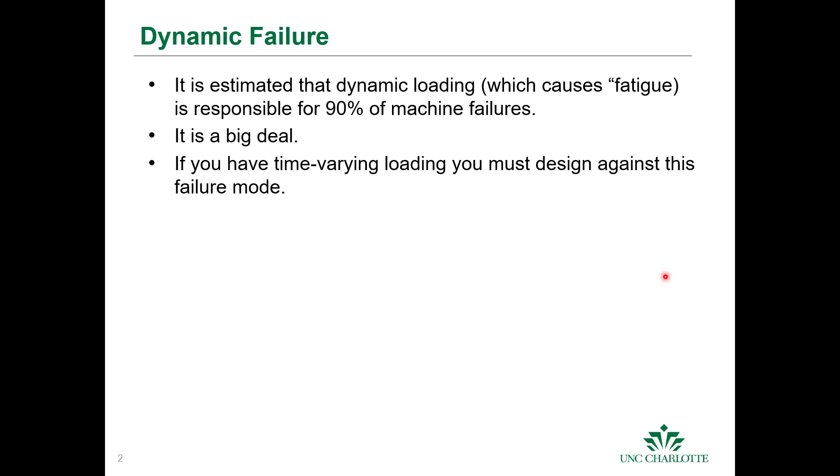The term fatigue failure is somewhat of a misnomer. It's accredited to Poncelet in 1839, where he said that the material became tired and became embrittled. We now know that materials don't get tired, they actually fracture due to cracks that initiate and propagate until they have catastrophic failure.

In 1982 U.S. dollars, they did a study. They found out that the cost to the U.S. economy for fatigue inspection and loss was about $100 billion, and that's about 3% of the gross national product. So as you can see, as a mechanical engineer, this is a primary concern in designing machines.

So what we talk about today will kind of help get you to a place where you can design machine components. But if there's larger structures such as aircraft, the theory that we cover here wouldn't cover the design of those machines, and they would require in situ testing of the product in the field.

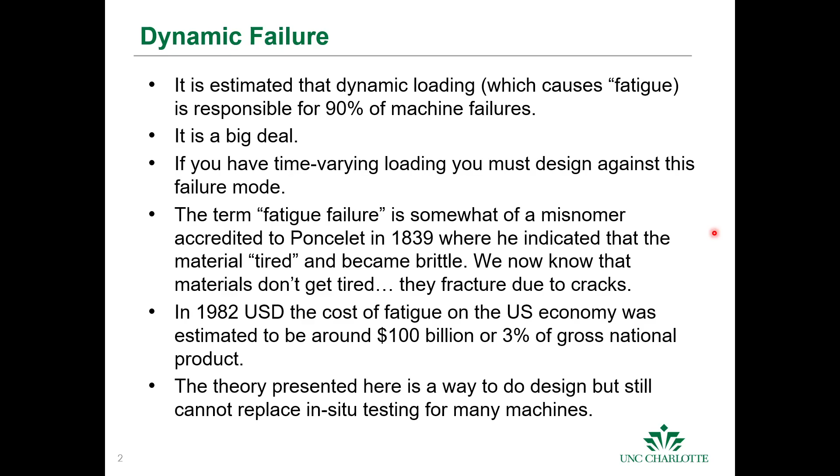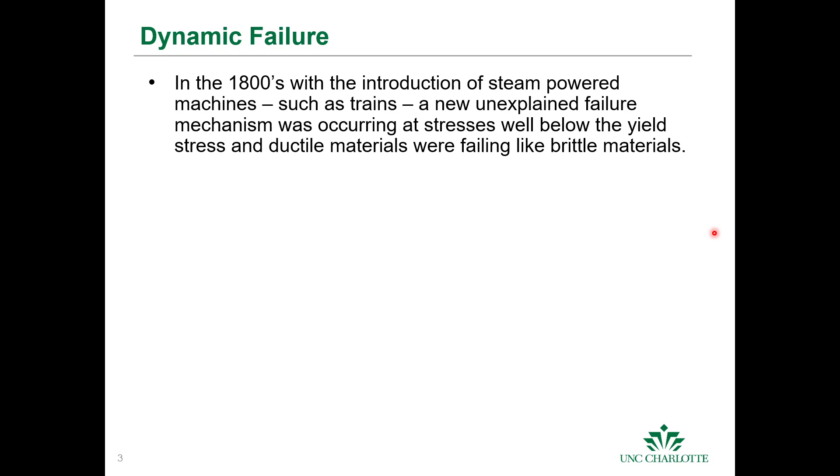Fatigue really wasn't discovered as a phenomenon until the 1800s, and that's when steam-powered machines became more widely used, and the axles in the trains would break even though they were made out of ductile material, and their failure surfaces looked as though it was just a brittle material. Which was confusing because there was no real theory to predict what was happening or why it was happening. But we now know that it was because of time-varying bending stresses that caused them to catastrophically fail.

It was August Wohler, a German engineer who spent over a decade studying this phenomena. And in his lab, he created a test experiment where he had fully reversed loading and discovered that there was a relationship between the failure and the number of cycles at different loads.

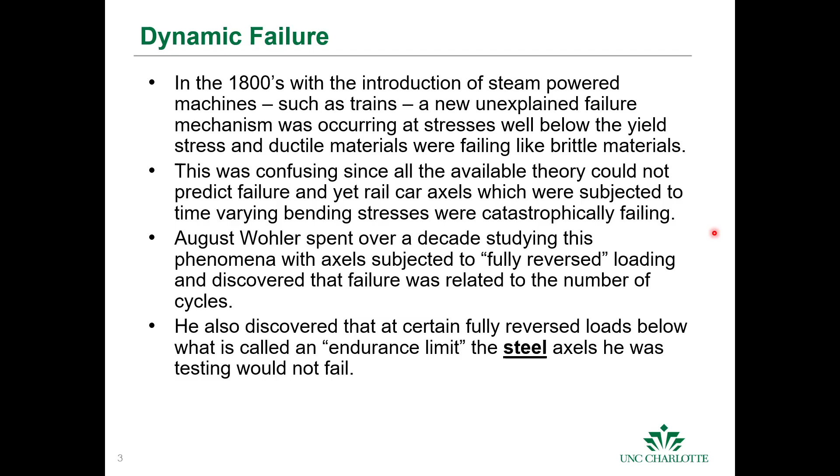He also discovered that below a certain load, even if it was a time-varying load, that the material would not fail in his tests, and this is what we now call the endurance limit. And the endurance limit is not in all materials. It's in most steels. And his work is summarized in what we call an SN diagram, where S is the strength and N is the number of cycles, or a Wohler diagram.

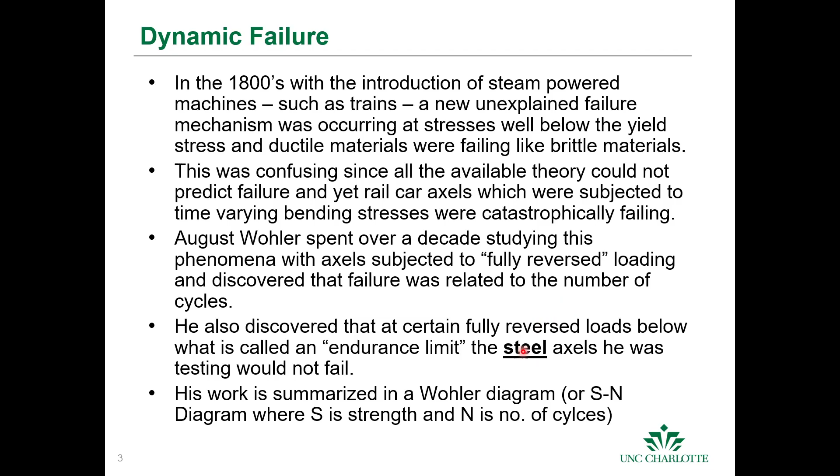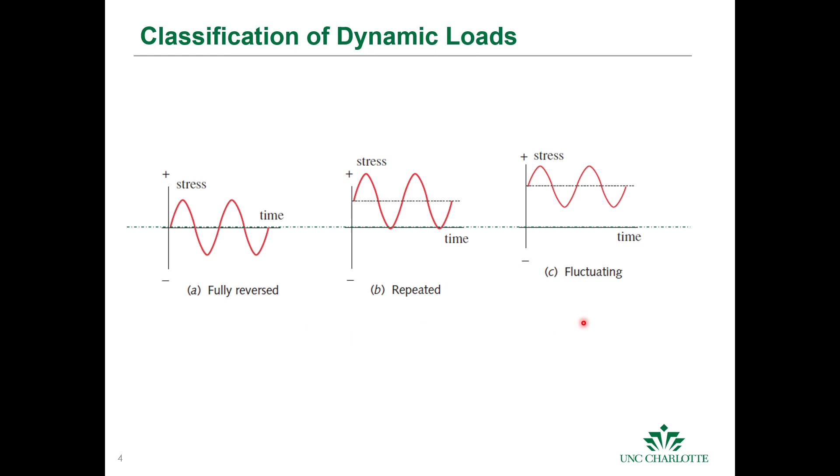That means that if it's subjected to a cyclical load at some point in time, it will fail. There is an endurance limit, however, for many low-strength carbon steels, alloy steels, some stainless steels, irons, molybdenum alloys, titanium alloys, and some polymers.

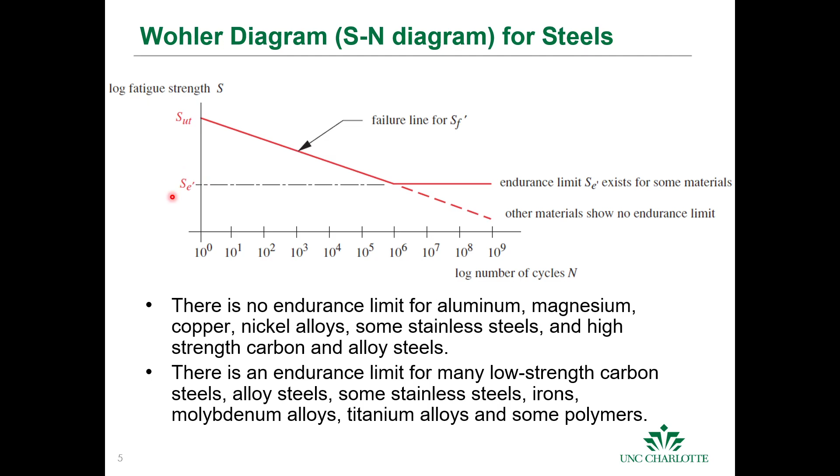So when we're doing a design, when we pick the material, if we're picking a material that's subjected to a dynamic load, we have to make sure that we'll never reach a certain number of cycles, or that we design so that it's a material that has an endurance limit and we stay below this endurance limit stress. And this is fully reversed stress that we're talking about. We have to stay below that value to guarantee the life of the product.

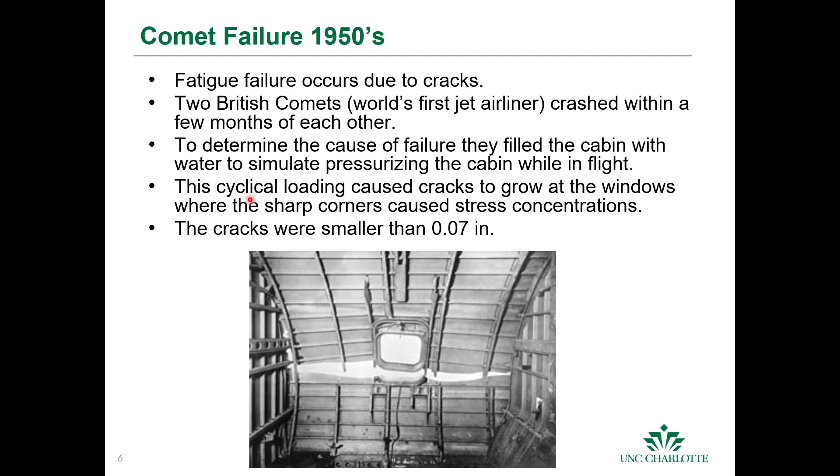Fatigue occurs because of cracks. There were two British Comets, the first jetliner, and they crashed within a few months of each other. They took the debris and reconstructed a test to determine what was causing the failure. They filled the fuselage with water and pressurized the cabin to simulate the stresses that would occur in flight. They found that cyclical loading caused cracks to grow around the windows, and these cracks were less than 70 thousandths of an inch. So even very small cracks in the structure, when subjected to dynamic loads, can cause catastrophic failure.

We now have pretty good understanding of how fatigue failures develop, and this is a description. We have three phases of fatigue, and the first phase is crack initiation.

This is usually a relatively short period of time, because of material imperfections, either real cracks on the surface or material imperfections inside the material, like inclusions or dislocations or foreign material inside the actual material. These cause microscopic stress concentrations, and those stress concentrations cause the material to yield due to the high stresses at those locations.

They exceed the yield stresses. You get localized plastic deformation, and these create what are called slip bands along the crystal boundaries of the material. If we zoomed in here, this shows the grain boundaries of, say, some metal material, and it has some imperfections. As it's loaded, these imperfections will move to the boundaries, and those boundaries merge into microscopic cracks.

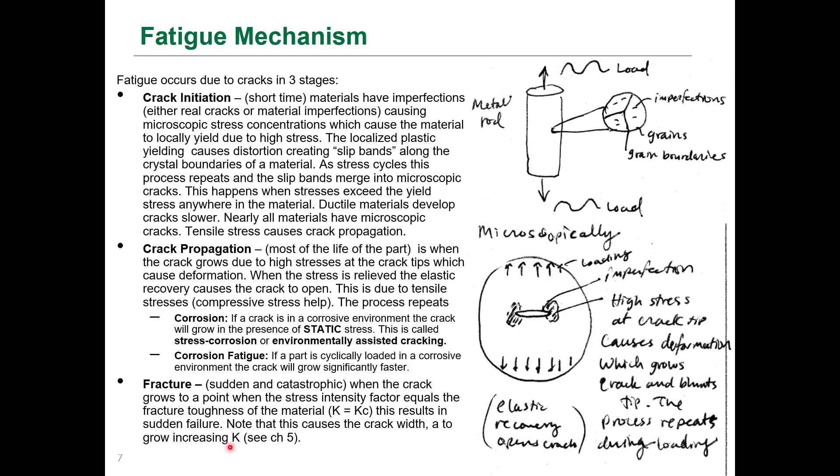Based upon what we know from Chapter 5, that causes the crack width, A, to grow, and when that crack width grows, it increases our stress intensity factor. Now remember, this is not your stress concentration, this is your stress intensity factor, and we can compare that with the fracture toughness, which is a material property.

If we zoom in on a material that has been fatigued, we can see these little beach mark patterns where you have a crack, and that crack is subjected to cyclical stress. It propagates along the surface with those cycles of stress, slowly and slowly and slowly, until you get failure. So you can see here, this is the origin of a crack, and it just moved all through the surface.

This is a keyed shaft that's in rotating bending. You can see how these lines move across the surface until you finally have a small area where your stress intensity is equal to your fracture toughness, and the material ruptures.

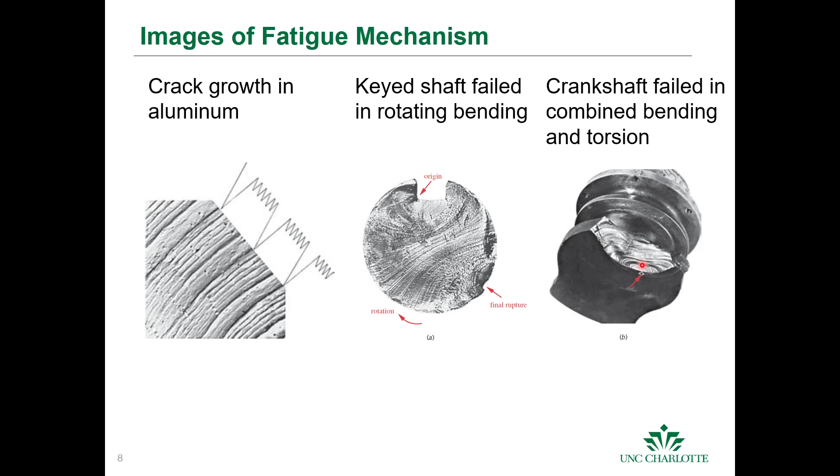This is another view, a crankshaft subjected to bending and torsion. Again, you see those marks and how the cracks propagate through the surface until finally it fractures off.

It turns out that the patterns left behind from a fracture are related to the type of bending, and this is a graphic from your book which shows how the crack propagates through a surface with different loading conditions. This here is a tension or tension-compression mechanism.

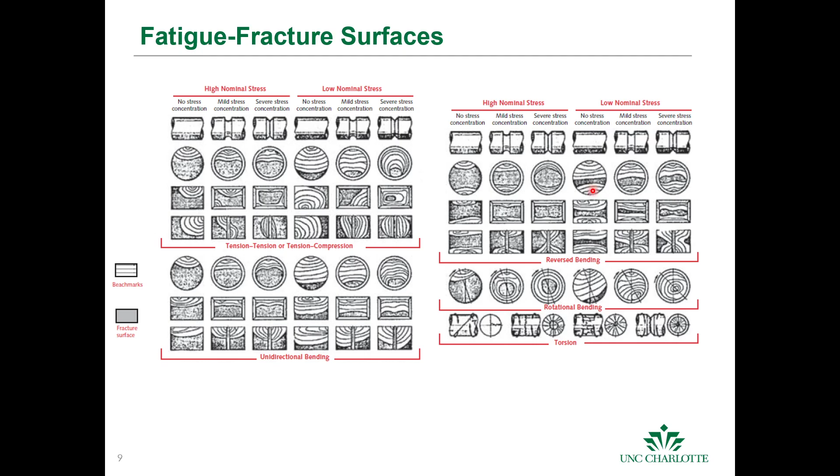And down here, this is from one directional bending, so this would be bending down in this direction. You can see the crack propagates until you get to a certain point in this gray area in all these graphs. This is when the surface fractures. You can see it for different geometries and different loading conditions. And here, if you have reversed bending, the cracks will propagate from both sides.

When we talk about fatigue failure models, we have a few different ways to look at fatigue, and we separate fatigue itself into low cycle fatigue, which is less than 10 to the 3 cycles. Some authors use 10 to the 2 to 10 to the 4. High cycle fatigue is greater than 10 to the 3 for the purpose of this book. We'll call low cycle fatigue those less than 10 to the 3, and high cycle fatigue greater than 10 to the 3.

We can use stress life models, strain life models, or linear elastic fracture mechanics. Stress life is the one we're going to use in this class, and it's used for high cycle fatigue. In general, the machines we're considering for this class are when we want a part to last more than 10 to the 3 cycles. This allows us to determine the fatigue strength of a material, expressed in units of stress, and we can relate that to the stress we expect the part to experience during its lifetime.

It's the least accurate of the methods, and we have to use safety factors and correction factors in our design based upon the environment, geometry, and some other factors that we'll talk about.

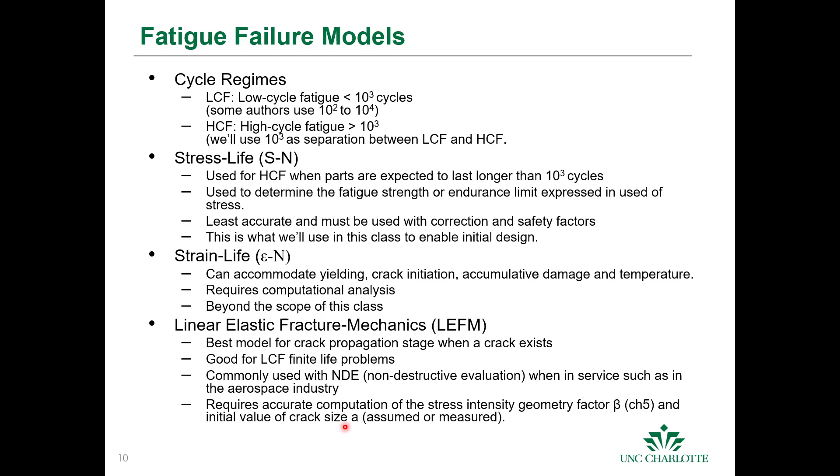It requires that they accurately compute the stress intensity geometry factors, which is the parameter beta from chapter 5, and that they have initial crack sizes that are either assumed or measured.

As I mentioned briefly, for a lot of machines that have predictable loads, such as rotational machinery, the stress life approach is suitable. For example, a crankshaft that's going to run 100,000 miles, we can calculate that it's going to experience about 2.5 times 10 to the 8 cycles and design against that.

For machines that potentially experience low cycle fatigue, such as transportation machinery where the loads are uncertain, like a hard landing or turbulence in an aircraft, or a ship that goes through a storm, these require intensive inspection and instrumentation data collection. This here is an image of a general loading condition, and you can see how the stress and loading can vary widely over time.

This is for a ship. This is moderate weather, this is a storm with high winds, and you can see how it's very difficult to predict the fatigue and remaining life for this. This is an aircraft in flight that experiences some turbulence, a thunderstorm, and then normal flight. In these cases, extensive testing and measurement is done.

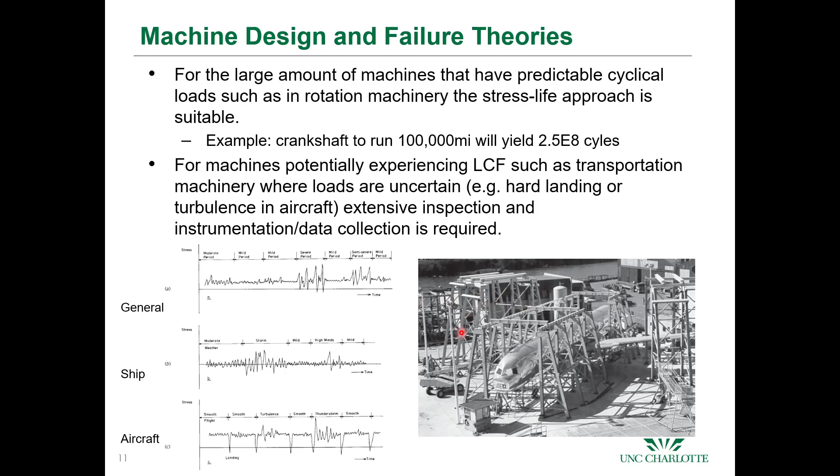When we talk about fatigue and the fatigue load classification, what is of interest for us in designing machines is to calculate our minimum and maximum stresses from our cyclical loading. The delta sigma is the difference between the max and minimum stresses. The alternating component here is the amplitude of the stress, it's the max minus the min over 2.

And then we have the mean stress, which is just the average stress. And then we have a stress ratio that's defined as the minimum stress over the maximum stress, and an amplitude ratio that's defined as the alternating component of stress over the mean stress.

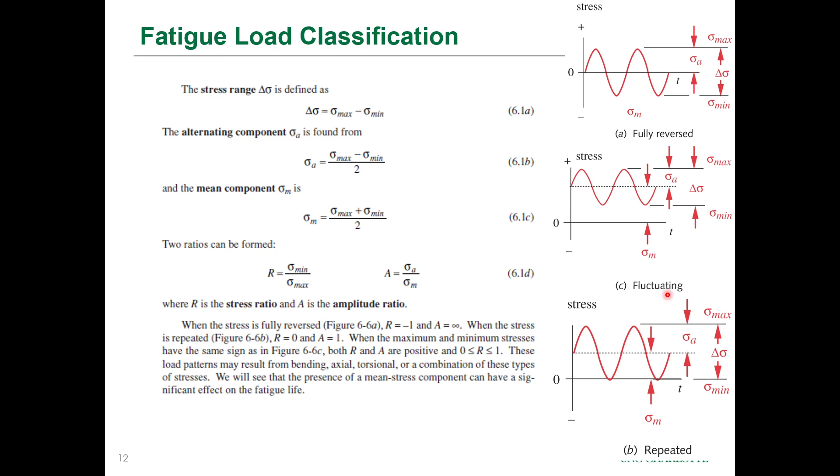When the load is fully reversed, the minimum is the exact same as the maximum, but a negative number, so we'd have a stress ratio of -1, and we'd have a mean of 0, so the amplitude ratio would be infinity. Sometimes it's useful to think in terms of the stress and amplitude ratios, and this is where those ratios would show up if we had fully reversed loading, fluctuating loading, or repeated loading.

Now, in order for us to study fatigue and understand what's going on, we have a lot of experimental data. In fact, most of our data that we have for fatigue failure comes from the fully reversed bending machine that was developed by R.R. Moore.

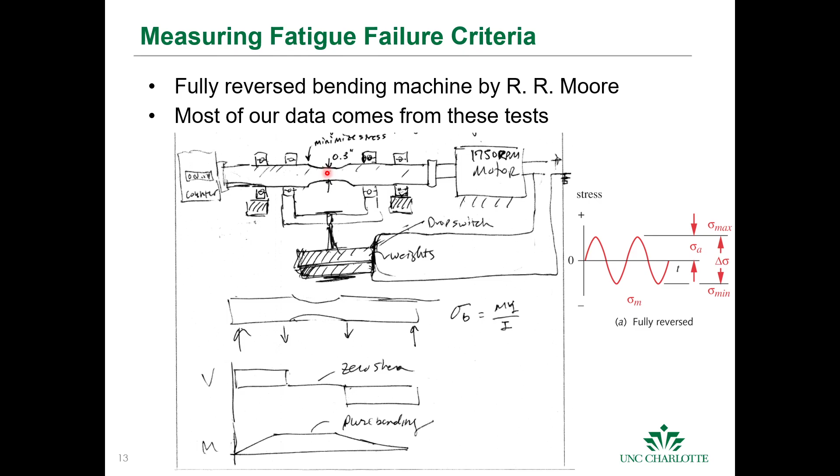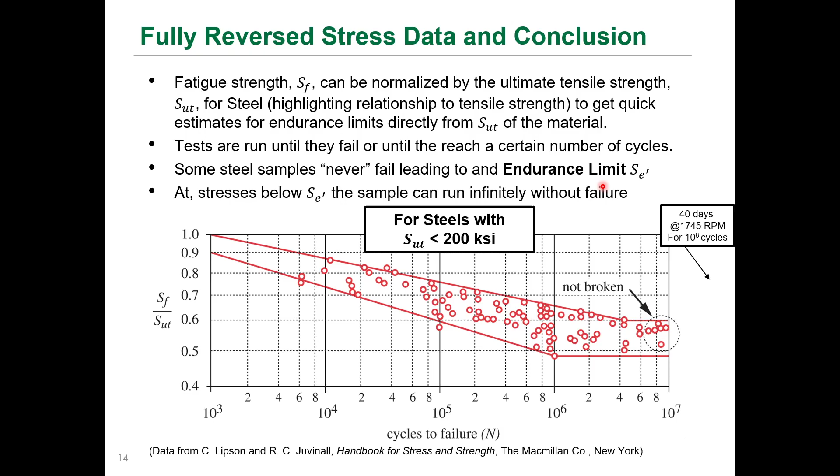The endurance limit exists for many low-strength carbon and alloy steels, some stainless steels, irons, molybdenum alloys, titanium alloys, and some polymers. I put that in here again to make sure that we don't walk away thinking that we can apply an endurance limit to any material. Some materials, such as aluminum, magnesium, copper, nickel alloys, and some stainless steels and high-strength carbon and alloy steels do not have an endurance limit. So their fatigue strength continues to fall as a function of the number of cycles.

Okay, now this graph is a graph for steels with an ultimate tensile strength of less than 200 KSI. And we see that we can find there's an endurance limit that's about 0.5, or 50% of the ultimate tensile strength, for materials that have an ultimate tensile strength of less than 200 KSI.

For materials that have a strength above 200 KSI, we limit the endurance limit to about 100 KSI. If you have a material with a strength of about 200 KSI, 50% of that gives you 100 KSI. But if you have a strength lower than 200 KSI, let's say 100 KSI, then your endurance limit would be about 50 KSI. If the ultimate strength is above 200 KSI, you still have to limit your endurance limit to 100 KSI.

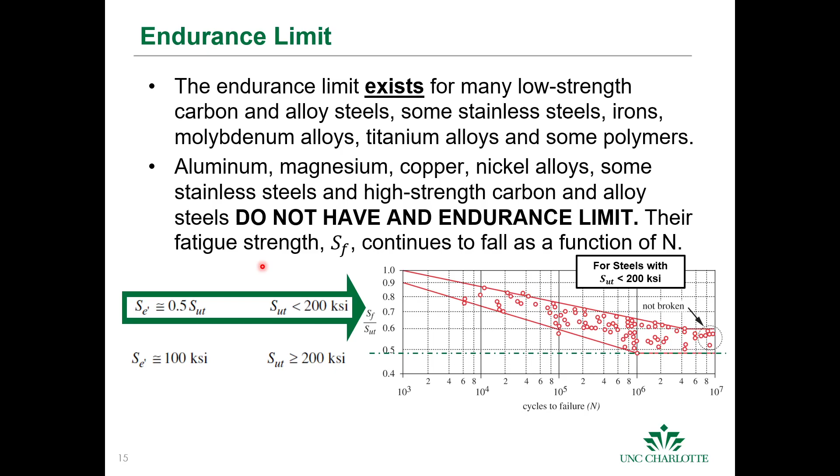We'll summarize these later on. This is for steels. So what we have to do is design with the endurance limit, which we call S sub E prime, and modify it with correction factors to get an actual endurance limit.

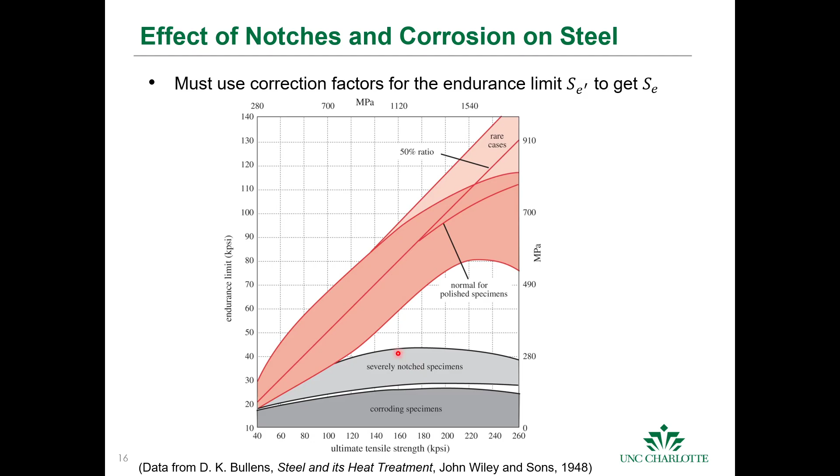You can see there's a wide band of data here. Because this data spread is so high, designing with that case gives us about 50% reliability. If we have severely notched specimens, which give us stress risers, we have significantly lower endurance limits. And if we put these devices or machines in a corrosive environment, we have even less of an endurance limit. So the endurance limit of a material is highly dependent on the environment it's in and whether stress risers are present in the design.

For materials that do not have an endurance limit, their fatigue strength continues to fall as a function of the number of cycles. So what is done is a certain number of cycles is selected as the fatigue strength.

We can design against the fatigue strength for these other materials, such as aluminum, using the available data. But if we continue to load them above their rated cycles, their fatigue strength continues to go down, and you will eventually get failure. So there's no knee, as we saw in the Wohler diagram for steels.

For materials that do not have an endurance limit, we use 5 times 10 to the 8 cycles to establish the fatigue strength of that material. So if you're designing a machine that has dynamic loading, you'd actually have to calculate how many cycles you expect it to experience. This is done for modern rail cars, vehicle axles, crankshafts, transmission components, etc.

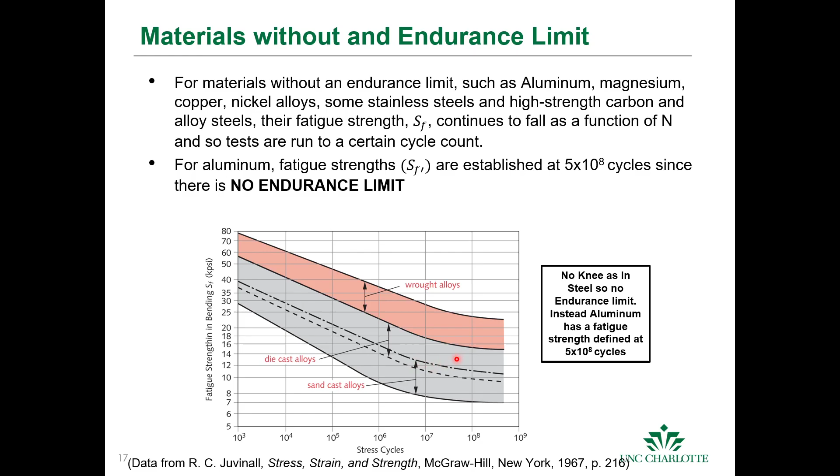The material manufacturing process also has a dramatic impact on the fatigue strength of a material. This shows the fatigue strength of a wrought alloy—I believe this is for aluminum. This is for die cast, and this is for sand cast. Obviously sand cast has a rough surface, so it gives plenty of opportunities for cracks to initiate and propagate into catastrophic failure.

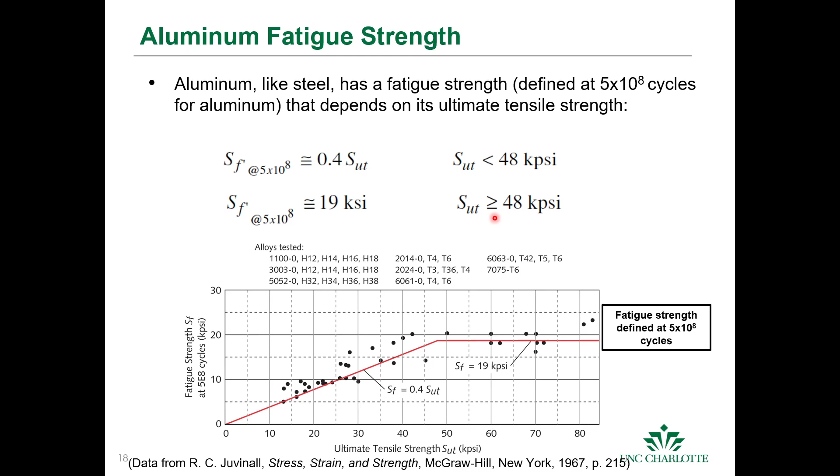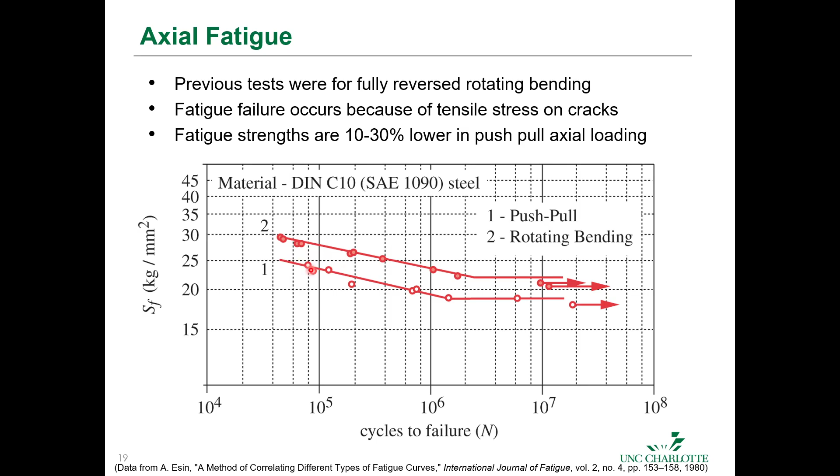The tests and graphs we looked at for the last few slides were for fully reversed rotating bending from the R.R. Moore test machine. We know that failure occurs because of tensile stresses on cracks. When we put a specimen in axial or push-pull loading, we have direct and uniform stresses across the cross-section, resulting in a fatigue strength that's 10 to 30% lower than in rotating bending. So the loading also affects the fatigue life—here on top is the rotating bending test, and here on the bottom is the 10 to 30% lower fatigue strength of a material subjected to axial loading.

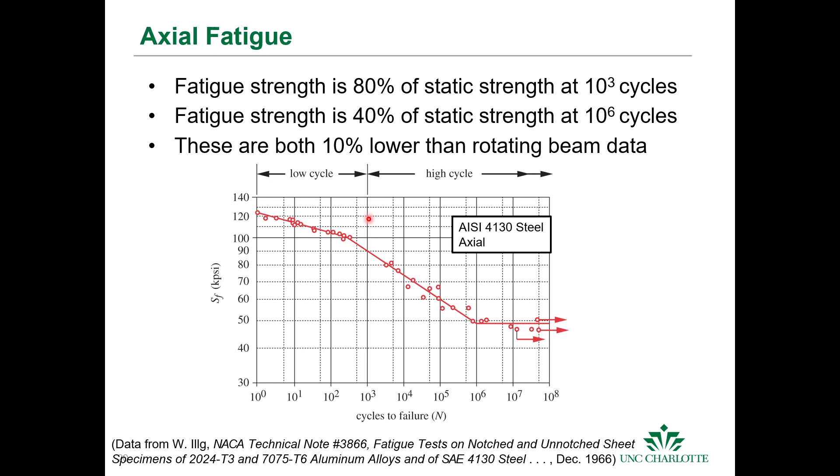The fatigue strength is about 80% of the static strength at 10 to the 3 cycles, and about 40% of the static strength at 10 to the 6 cycles. So at 10 to the 3, we're about 80% of the strength, and at 10 to the 6, we're about 40%. These are both 10% lower than the rotating beam data for this steel.

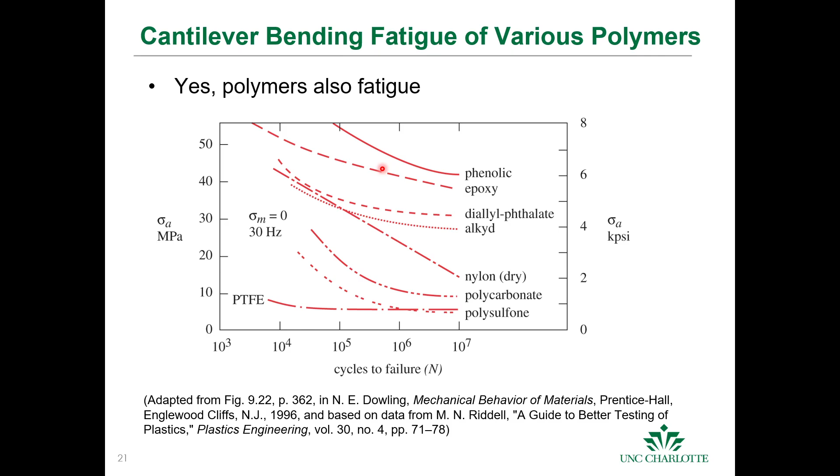Polymers also fatigue, and these are some different types of polymers. You can see that they have their own fatigue curves as well. It's worth mentioning that all materials are subjected or susceptible to fatigue, and it has to be a primary consideration in design.

We saw this earlier, that when we have equal and opposite principal stresses, we have a situation of pure shear. So we have to reduce the fatigue life of an object subjected to torsional reversed stress accordingly, and say that we can only have about 58% of the fatigue strength of the bending test data, and we have to account for that.

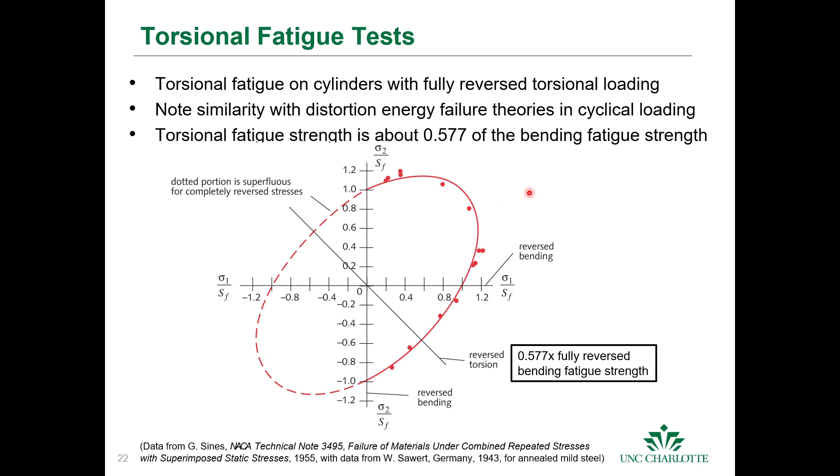So what happens when we don't have fully reversed loading and we have a mean stress that's not zero, in the case of a fluctuating load condition? Well, we can deal with that, and Gerber and Goodman have provided us with data.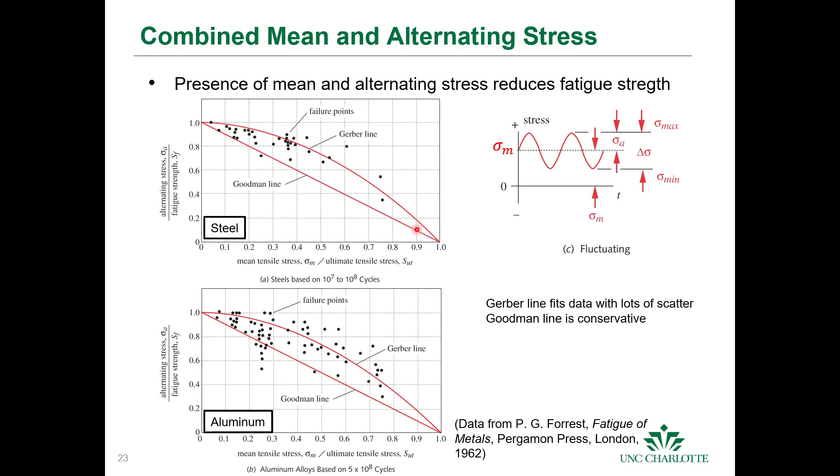One of the ways we can increase the life of a component is by introducing compressive stresses, because tensile stresses have a negative effect on crack initiation, growth, and propagation, and catastrophic failure. If we can introduce residual compressive stresses, then we can increase the fatigue strength of a material.

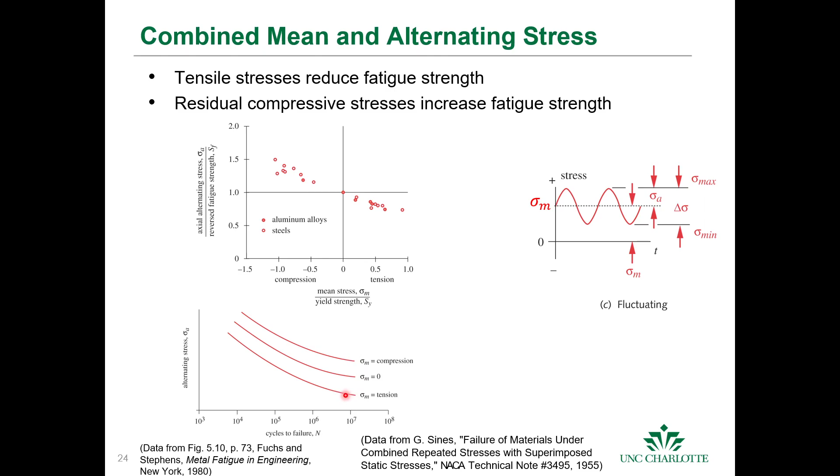Another way of looking at this is to look at the alternating stress in the presence of different mean stresses. If we have an alternating stress with a mean stress of 0, as in the reversed bending test, this is the graph we get. If we put that same material in compression, we get an increased fatigue strength. However, if we put that same material in tension, we drop the fatigue strength of that material. So we'll stop there and continue with some more details.